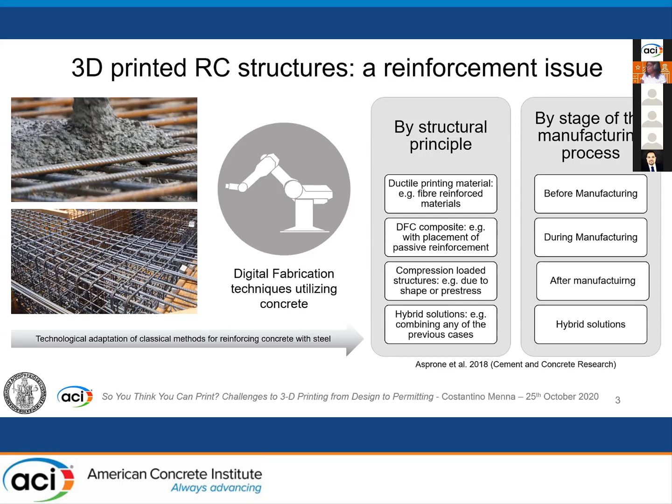These structural principles obtained with digital fabrication can also be related to time - the stage of the process in which reinforcement is added. Of course, the most interesting solution is when reinforcement is added at the same time as the printing process. A recent review paper by Harald Kloft has collected all these typologies.

This paper classifies typologies in which additive manufacturing is combined with reinforcing methods. Reinforcement can really differ across the different technologies available. For instance, in layered extrusion technology, as we've seen from the former presenters, reinforcement can consist of rods placed parallel, orthogonal, or inclined with respect to the printing layers. But reinforcement may also consist of filaments woven around the concrete filament, or inserted as discrete fibers between the layers.

Another type of reinforcement is when steel represents a support for pouring or spraying concrete around the steel cage, or, as a last example, simultaneous use of reinforcement and mortar, considering the support types of steel.

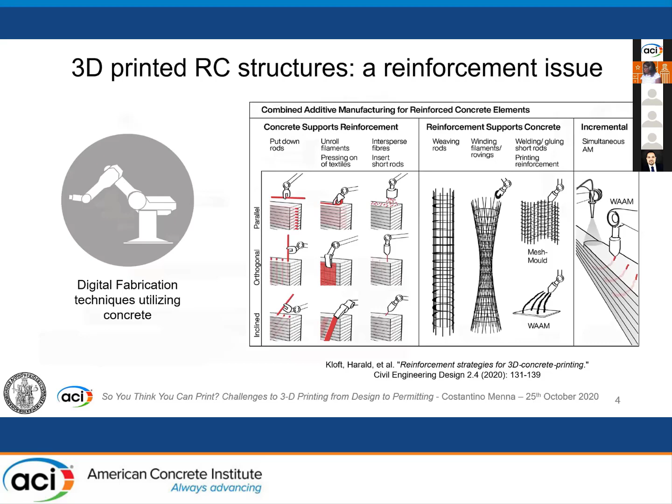By adopting these methods, we already have some structural objects printed so far. For instance, the 3D printed concrete pedestrian bridge developed and printed in the Netherlands, in which each concrete segment contains a structural steel filament, and the bridge is conceived as a post-tensioned bridge.

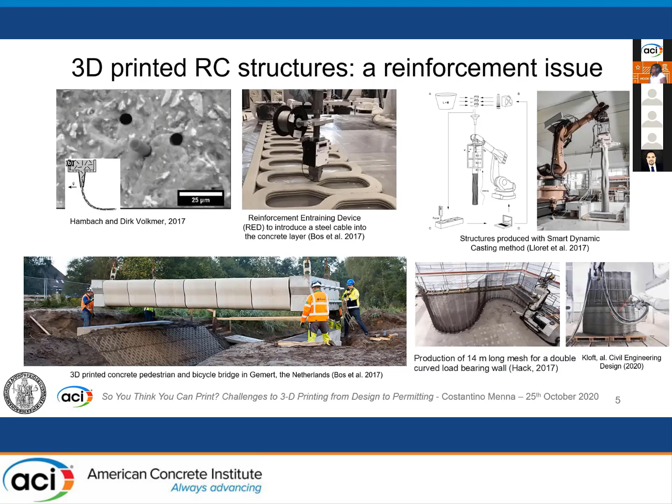We also have many examples of smart dynamic casting, in which structural steel is used as a support, and concrete is cast step by step throughout the height of the column. Or in the mesh mold process, concrete is poured inside a steel mesh that also represents the reinforcing system for the structural element.

Well, when we introduce steel inside a structural element with these innovative technologies, we have two types of problems. First of all, we can consider a new type of reinforcement, completely new with respect to the conventional ones. For instance, when we add filament inside the concrete layer, or we can try to adopt the conventional steel reinforcement in the form of bars inside a new digital fabrication technique. For instance, here on the right-hand side, you see some steel rebars included between the layers of an extrusion layer technology, to understand the effect of this combination.

In both cases, we must say that what changes is that the failure modes will be completely different from the failure modes that we normally adopt in the design process. As well, we see the bond is different due to the formation of voids, and as a consequence, during the design we cannot adopt the previous and available models for bonding between concrete and steel.

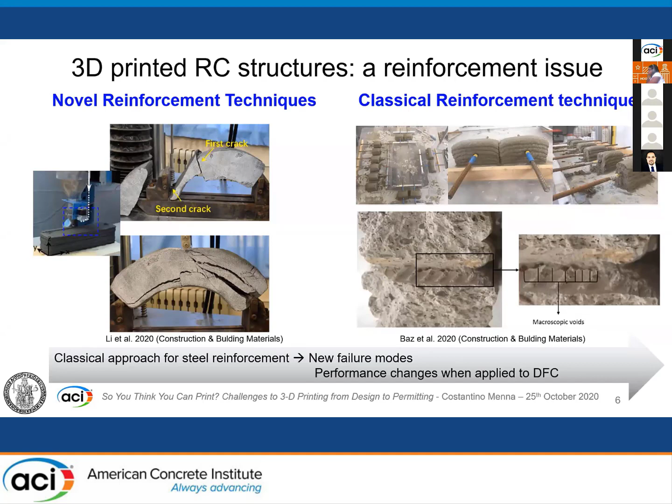So this is a key point for developing and deploying this technology, especially when we deal with reinforcing systems. I'm going to present here two examples, trying to show you how this critical point of reinforcement can affect the design of the structural elements.

These two examples consist of two structural beams, obtained by means of two different methods. In the first method, we consider that the reinforcement is applied as an external reinforcing system, and in such a way this reinforcing method is innovative, different from the conventional one. I will show you how this innovation brings real complexity for code compliance. The potential benefit is that for this external reinforcement technique, we can achieve a reduction of the amount of concrete when we produce this structural element.

The second example is the other way around. We adopt a digital fabrication technology to produce a lost formwork with concrete, and we adopt conventional steel rebar systems, where the amount of steel is designed and quantified according to the structural code. So in this case, we start with code compliance of the steel. The benefit is that with this technique, we can achieve additional functionalities of the structural elements.

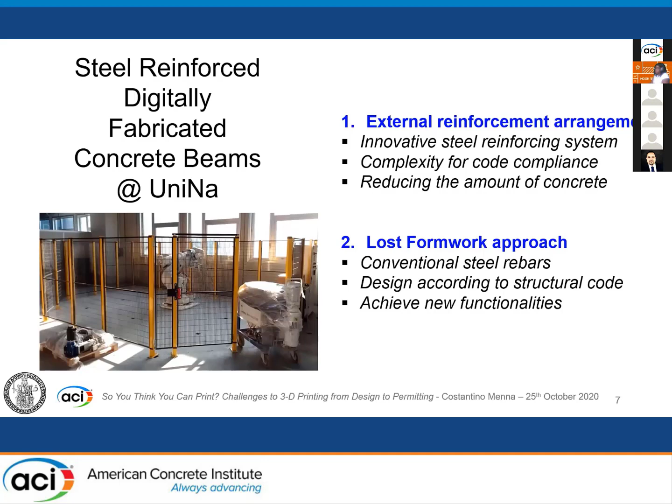But the examples I'm going to show you are manufactured at the digital construction labs in Naples, which I'm working at, and it is still active to study particularly the structural aspects of digital fabrication.

Well, the first example starts from a beam with a variable cross-section on the left-hand side. In particular, we have potentially a beam that changes the cross-section through the x-axis. To apply these 3D printing techniques to the structural element, we ideally cut the entire beam into several segments, mostly depending on the dimensional capability of the 3D printing machine. Once the concrete segments are printed separately, we can...

...merge together the segments with an external reinforcement system, which is connected through an out-of-plane system of rebars. Of course, this is one of the possibilities, because all the segments could also be connected with post-tensioning cables. It should be noted that with these techniques, we consider the segments which are printed and are connected in the direction parallel to the printing direction.

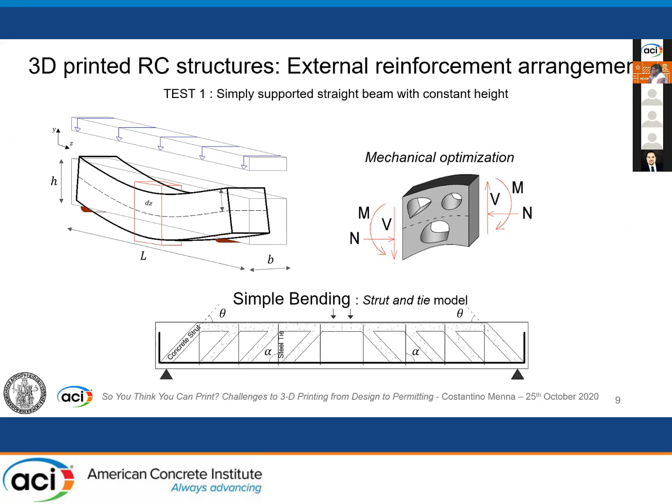What is the benefit? The benefit is that each of the concrete segments can be optimized with respect to the mechanical properties. For instance, in the case of simple bending, each concrete segment can be optimized with respect to the bending resistant model. In our case, we have chosen a strut and tie model which mimics the bending resistant model.

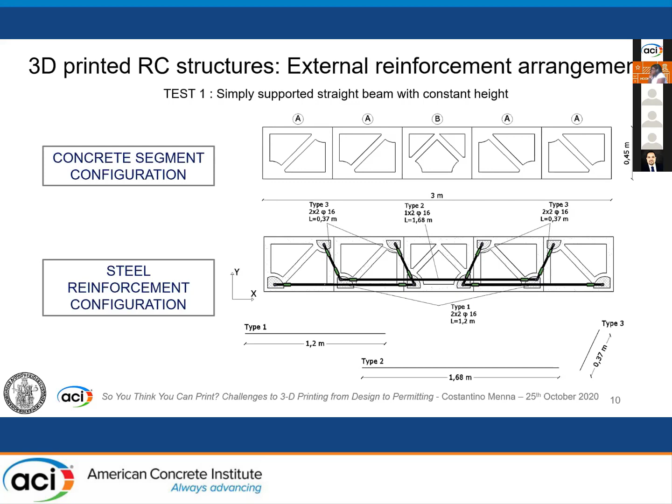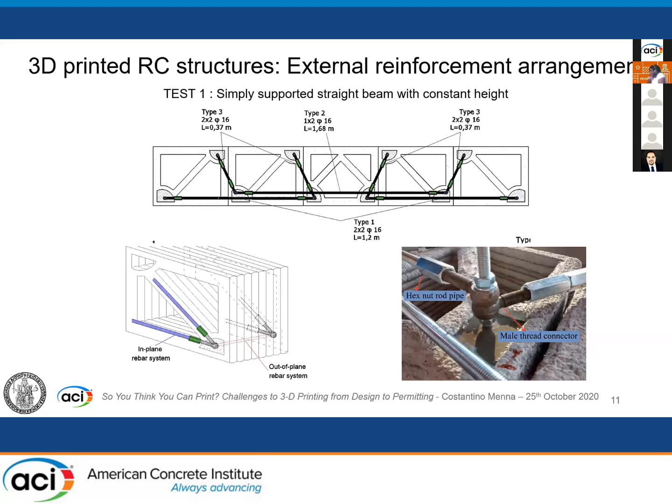Here is the result. The 3 meter long beam is ideally divided into 5 concrete segments, in which you can see the concrete strut of the resisting mechanism, and afterwards an external steel reinforcement system is applied. The steel reinforcement consists of longitudinal bars to guarantee the resisting bending moment, but also inclined rebars for shear resisting mechanisms. These rebars are connected by means of hexagonal nut pipes and male threaded steel elements, in order to calibrate the tension inside each of the steel elements.

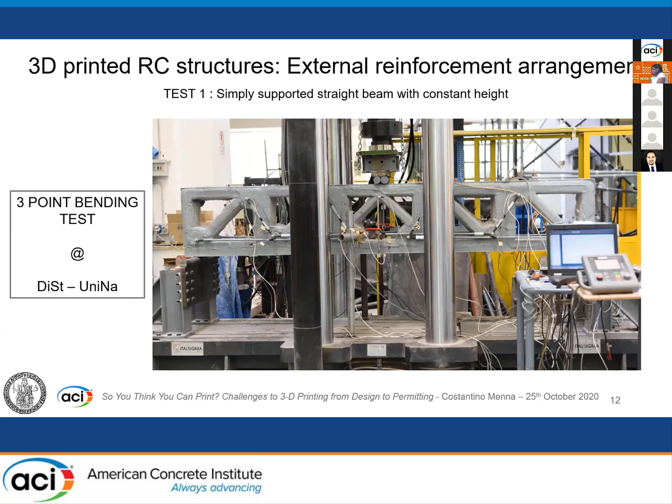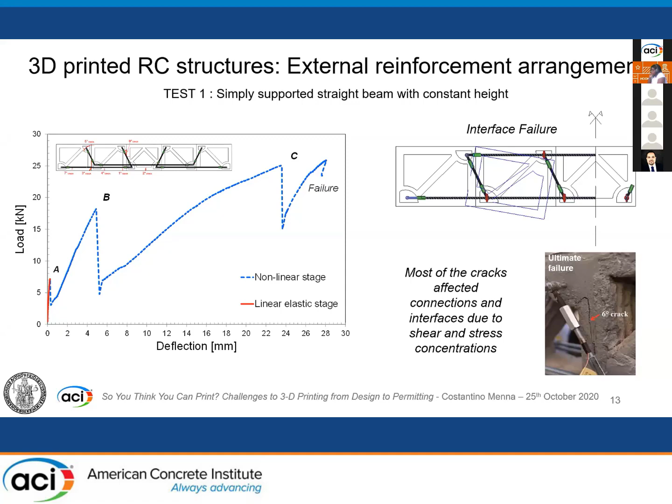Once printed, this beam was tested because there was no idea of the designed bending moment and the real capacity of the beam. We tested it here in the lab in Naples to see if there were new failure mechanisms unexpected from the conventional design point of view, and indeed these appeared. Here you can see the flexural load versus deflection curve that highlights several drops in this trend, because during the loading phase we experienced many cracks at the interfaces of the concrete segments, as most of the stress concentration was located at the points where the external steel reinforcement was anchored. So many criticalities arose in terms of anchorage systems.

But the local failure mechanisms at the interface actually introduced a critical point that prevented the external steel from reaching yielding. So we had a premature failure due to anchorage failure.

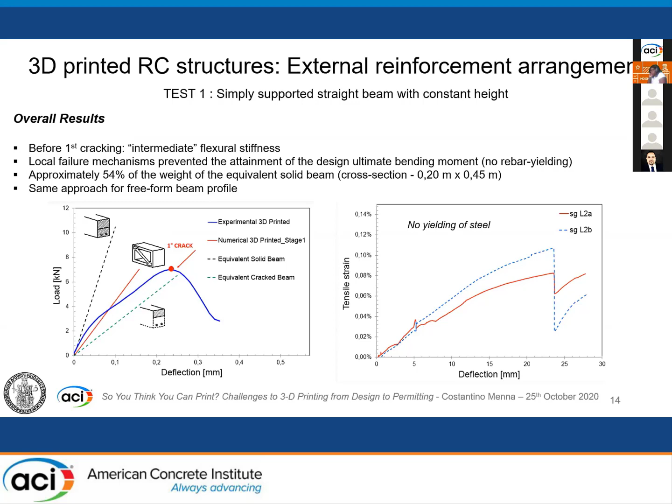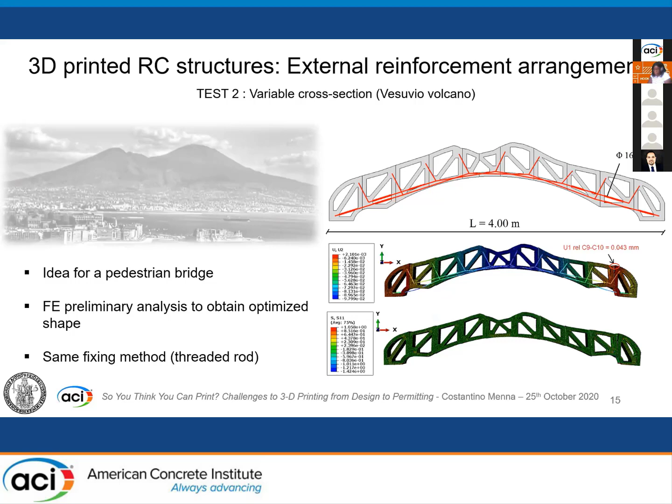We have adopted the same technique also for other beam systems, to show the potential of this approach with different beam profiles. We applied this approach to the profile of the Vesuvius volcano, where we defined at the beginning the upper and lower edge of the beam, and then by simulation defined all the geometrical dimensions and the dimension of the external steel reinforcement to guarantee the resisting bending moment and the minimum deflection. This was the result.

Beyond these considerations, what we have learned is that first of all, many of the interfaces should be avoided, and this can be achieved by changing the printing path and employing a larger robotic system.

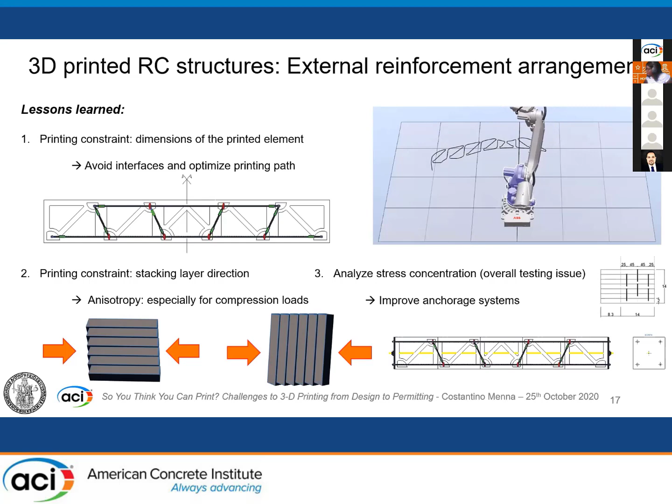Another important consideration is that loading the specimen in the direction parallel to the printing direction may be a problem for compression load, because that direction is probably not the stronger direction when we consider the anisotropy of the printed material.

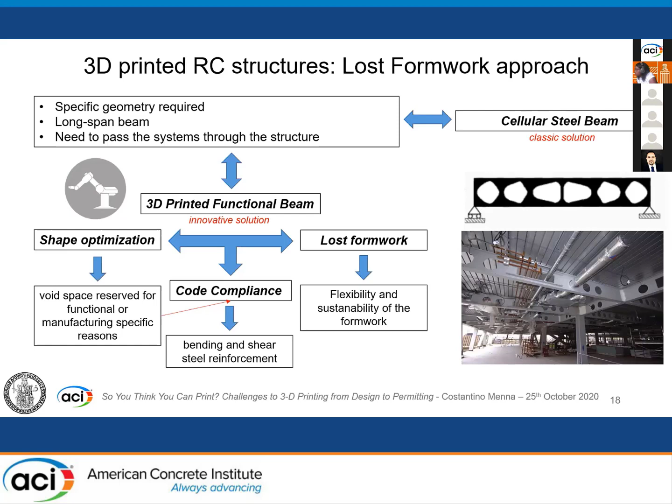The second example I'm going to show you is the lost formwork approach. In this approach, we print the formwork, and we optimize the shape with respect to the new functionality of the beam, for accommodating new systems, but also for guaranteeing that the minimum reinforcement and the amount of concrete is compatible with code compliance, particularly with respect to bending and shear steel reinforcement. This is normally done in practice with steel beams, so we explored the idea to consider concrete beams.

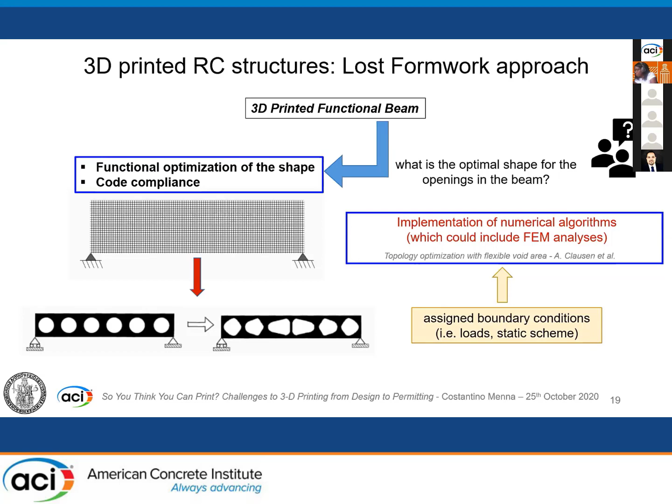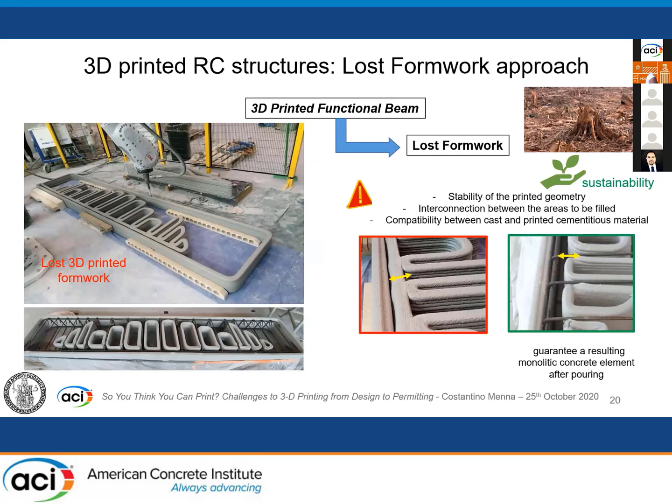The shape optimization with respect to minimum reinforcement and functionality was made by means of finite elements, and here from the picture you can see some of these stages. From these stages, we have to guarantee the stability of the printing layers, but also the interconnections between the shapes, in order to guarantee a monolithic poured specimen after considering the formwork.

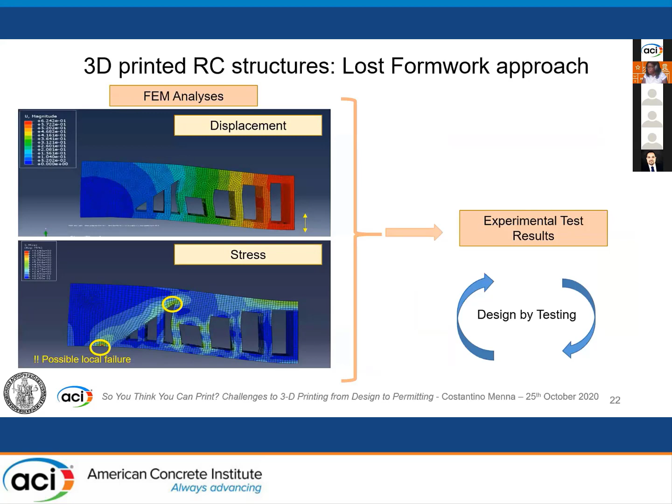After showing this manufacturing part, also in the case of lost formworks, the local failure mechanism can limit this technology, and this is what I'm going to tell you in the conclusions, because these two possible approaches for structural element production are feasible, but as far as we know at the moment, we have to improve our knowledge with respect to the failure mechanisms in order to drive a much more reliable approach for the design.

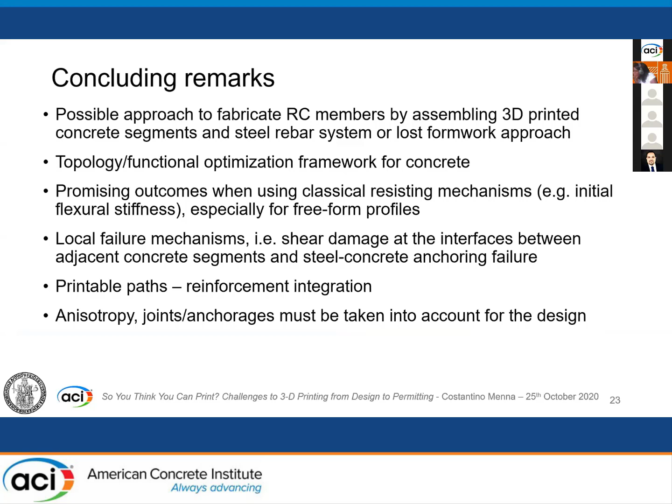This can be done with a multidisciplinary approach, and also by considering some exceptions of the structural code in reference to innovative construction products, such as some annexes of the Eurocode 1990, that allow for experimental-based acceptance of the structural element.